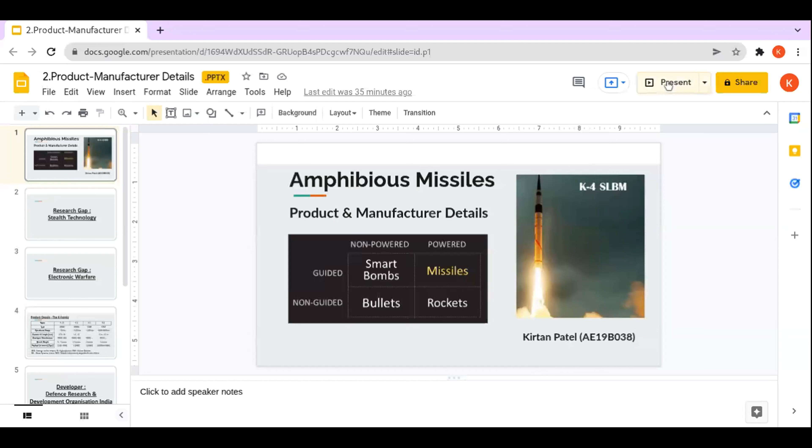So my focus will be basically on two things which I've narrowed down. The first is stealth technology. In November 2021, the Indian Navy introduced a stealth guided missile destroyer, INS Vishakhapatnam, which carries anti-submarine missiles. It was a 35,000 crore project, with a total of 4 warships to be delivered. The first was delivered in November 2021, 2 will be delivered in 2023, and 1 in 2025.

Now, the stealth technology which India has used is limited to ships. On the other hand, the AGM-158, in service with the US Air Force since 2009, is a stealth technology missile. It was developed by Lockheed Martin. It carries 450 kgs of armor to a distance of 1,000 kilometers. Not only the US, it has even been extended to foreign services, being used in Australia, Finland, and Poland since 2014.

India has not been able to develop such a missile, and stealth technology is limited only to ships up till now. So this is the point which I'll be focusing on further. The US already had 2,000 such missiles given to the US Air Force in 2016, while India has none. The other part I would like to focus on is electronic warfare.

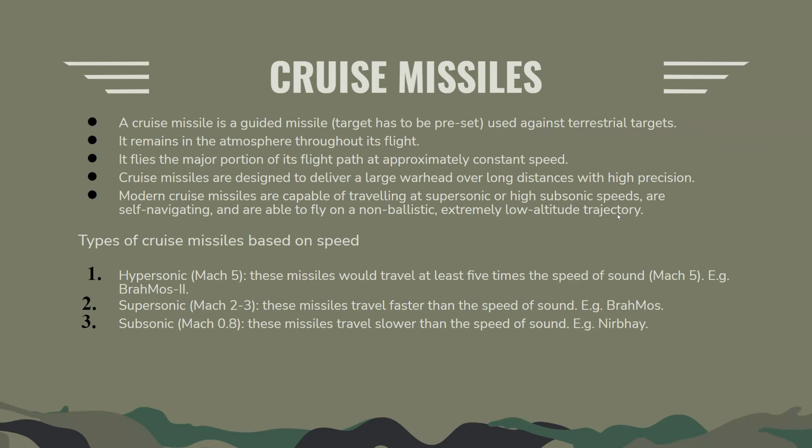Yeah, so we have Indian missiles, which are of different ranges and all. Pavitra, you can skip all these things. Okay. So what you are planning to do, so it is like BrahMos, it's fine. So then, okay, so sir. I need some technical strong base. So what you have done, some literature survey. And because you are from aerospace, no? No, mechanical engineering. That's fine.

So then, okay, ballistic missiles and ancient manuscripts. Basically this hypersonic missile, which is Mach number greater than 5, the idea for it I got from Vaishnavastra, which travels with fast speed, the hypersonic part of it. Even the defense minister has mentioned that this is the focus point right now, where we have to develop something in the hypersonic area. So that is going to be my central point.

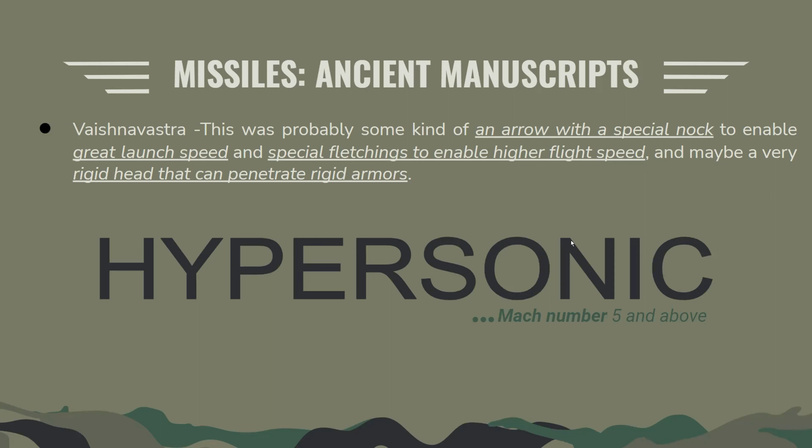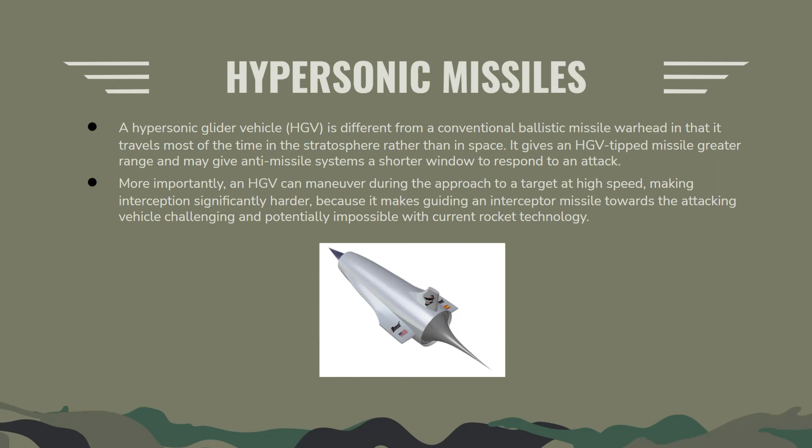And for hypersonic, this is going to be like a cruise missile type, wherein it passes a particular trajectory path, and then based on the navigation, it follows a certain path. So that is my plan. Mainly I want to focus on the design part of it, the propulsion system, because as the speed increases, the friction, heat generated and all will come as a disadvantage for us. So using metallurgy and design, solving these problems, and the cooling system also needs to be made more proper. So that is my focus, what I want to do.

So design of propulsion systems means you have to go for the scramjet, the supersonic combustion ramjet engine. There are several issues there. Do you know what is meant by positive thrust or negative thrust? No, sir. Positive thrust means whatever thrust you are producing should be more than your drag. Then only any vehicle could go forward. Some net thrust should be positive. It's something like that.

Then from a metallurgical point of view, you are from mechanical, so you can do a lot of heat transfer analysis. Yes, sir. I found a research paper based on it. Metallurgy means molybdenum alloys or some Inconel alloys, so it can withstand very high temperatures, and you can use Bartz equation. Bartz equation is used for high speed flow, let's say Mach number more than 5, how the heat is transferred from gas to solid. In between there are boundary layers, velocity, momentum boundary layers, and thermal boundary layers. It's based mostly on Reynolds number, Stanton number, and Prandtl number.

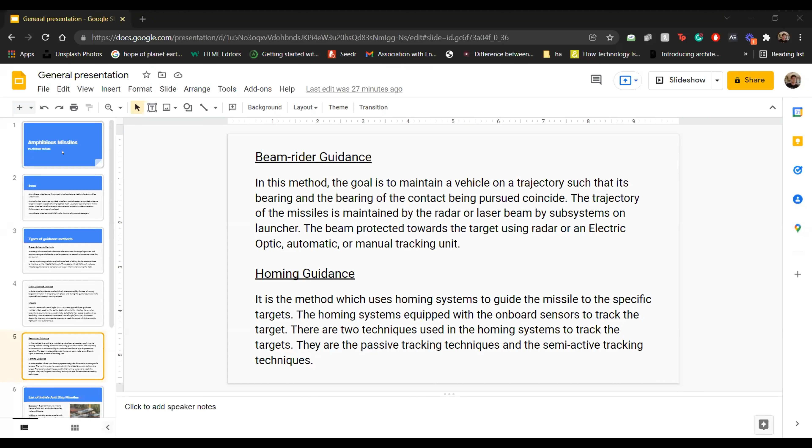Yeah, so I was able to attend the meeting last time, but I wasn't able to present because I was sick the whole week.

So basically, my topic is also amphibious missiles, and these are the basic definitions and theory about amphibious missiles that I wrote down. But since the missiles have 5 system components - targeting, guidance systems, flight system, engine, and warhead - my main focus and interest was towards the guidance system, as in how the missile goes and hits the target perfectly in almost all cases.

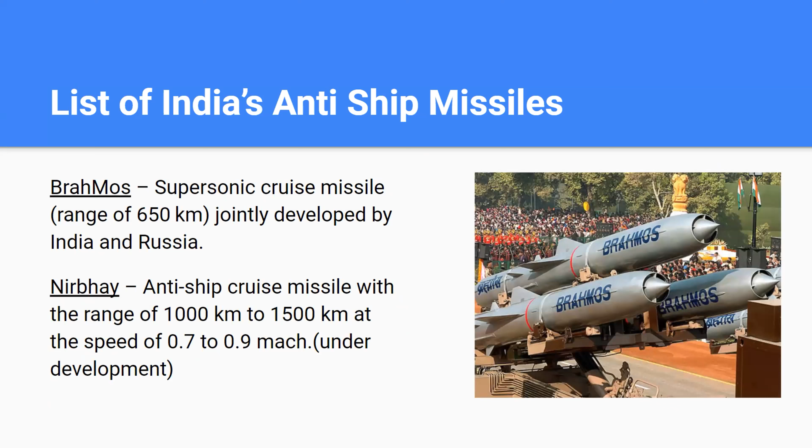So I went through what type of guidance systems are there and what are all the other guidance methods which are there. Towards the end of my very basic research, I looked at the guidance systems that India currently has and the ones it is buying and importing from other countries. My plan going forward is to solve the problem of precision killing.

So there are two issues. First is when the missiles don't clearly hit the target on point, and the other issue is basically the enemy recognizing the missile in range and then trying to combat it.

So with this, I found that the loitering munition system is one of the things which can help solve both of these problems. In a very recent news, I also read that the Indian Army plans to buy medium range precision kill systems, which has this loitering munitions.

Loitering munitions is basically something that loiters over the target for some time, so that even a target which is hidden and appears only for a few seconds can get hit.

So I wanted to focus on this and see what I can do here. There is a clear research gap in India currently because we don't have a loitering munition system of our own, and we are currently looking to import it from outside.

So it basically allows selective targeting of any target we are looking at. I wanted to focus on this. At this point I don't have a particular base on how to get started on this.

I've just been doing some research on what India currently has and what it is lacking in. I haven't been able to build a base yet, so would love all sorts of help from you to take this forward.

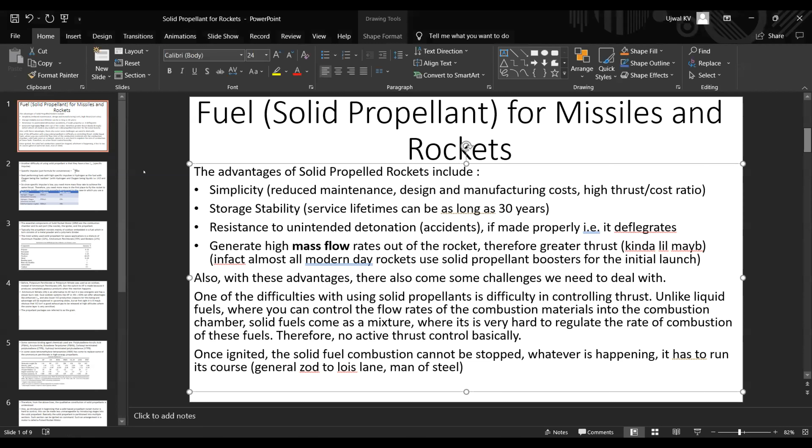Yeah, am I audible? Yes, we'll carry on.

So in the last meet, I presented the general overview on amphibious missiles, and you specifically instructed me to work on the fuels part. The two main important things are the guidance system, control system, and the fuel part. I did some research on the fuel part, and in the last meet I concluded that at least in the initial stages of launching the amphibious missile, we need to use solid fuels. Here is some justification why I feel solid fuels are important.

First is the simplicity of solid fuels. They are very easy to maintain and easy to design. All you need to do is make the solid fuel paste and put it in a rocket tube, line the tube with insulation, make sure the material can sustain high temperatures, and that's pretty much it. Even manufacturing costs are very easy. If you look at liquid fuels, you need so many pipes, pumps, storage of liquids, and make sure the liquids don't leak out from the chambers.

So solid fuels easily outperform liquid fuels in this area, and they even have a high thrust to cost ratio. If you look at the materials used for solid fuels—ammonium perchlorate, aluminium, whatever the materials are—if you sum up all their costs and find out how much thrust they generate, it has a high thrust to cost ratio. So it's very affordable. And then there's storage stability.

Solid fuels are also very easy to store. They can be stored as long as 30 years once the rocket is manufactured. So if India is keeping some missiles in its inventory, it need not continuously keep them under surveillance. It also has resistance to unintended detonation—for example, you must have seen when rockets launch, like SpaceX, etc., sometimes detonate, there's some margin of error. But for solid fuels, it's hard for accidents to occur. If the solid fuel chamber is manufactured properly, there is very little chance of detonation.

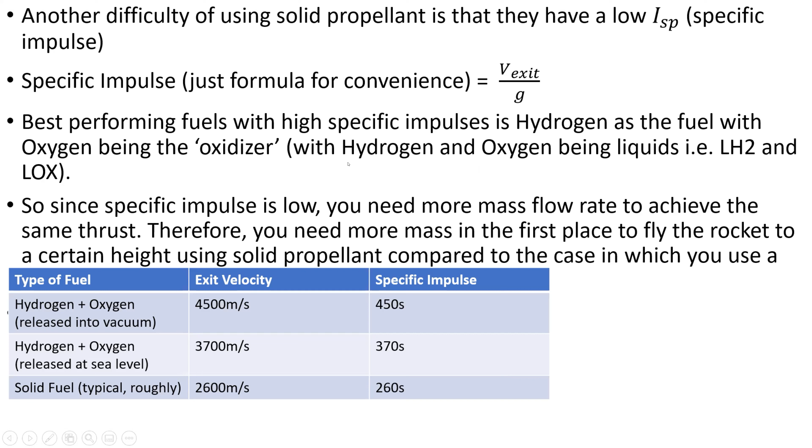Now let us explain the constituents of the solid rocket motor. It's the entire engine which has the solid fuel. It has a combustion chamber where the solid fuel is housed, an exit port or nozzle, and an igniter which ignites the solid fuel. The propellant is the main thing we need to develop, since the exit port and other parts are already engineered.

The propellant has an oxidizer embedded in a fuel. This is the main reason I chose a solid fuel instead of a liquid fuel — when the propellant has its own supply of oxygen, you don't need oxygen from air, which is why this missile can be detonated even underwater where there's no oxygen. If you keep the solid fuel inside water and ignite it, the reaction still happens and thrust is still generated. Compare this to ramjet engines, which need a steady flow of atmospheric oxygen to work.

The percentage composition of the solid fuel consists of aluminum powder, ammonium perchlorate, and binders. Aluminum powder is the metal which takes away oxygen from ammonium perchlorate, which is the oxidizer. A binder, as the name suggests, binds the aluminum powder and ammonium perchlorate together to create a homogeneous mixture. This might remind you of the thermite reaction, where aluminum reacts with iron oxide, removing oxygen from iron and generating heat — it's very similar to that.

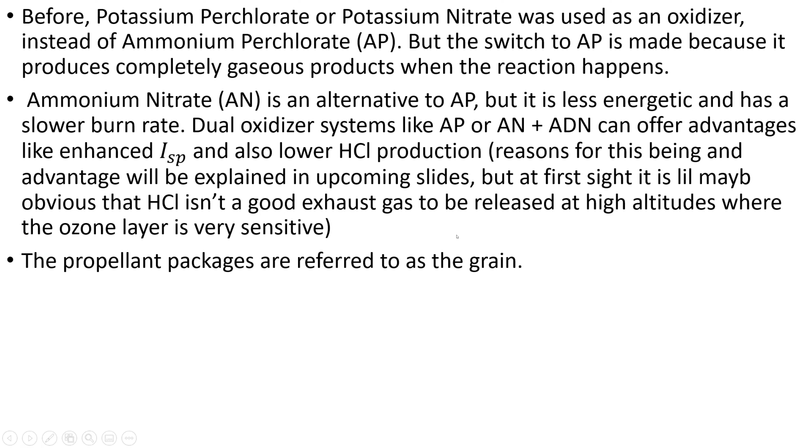And here's some convention. The propellant packages are referred to as grain. So if you look at propellant in the combustion chamber, propellant in storage is called grain. And so now we covered oxidizers. Now let us come to binding agent. Binding agent is the agent which binds the oxidizer and the metal powder together. And there's nothing conceptual in it. They're just standard chemicals: polybutadiene, acrylic acid, EVA. So these are the industry used binders.

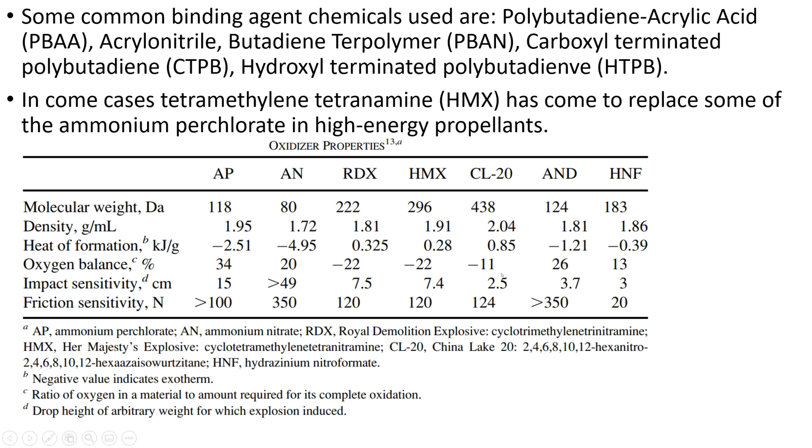None of them are really toxic. I mean, there's a lot of concept in oxidizers, but here I think there's not much. We can use any one of them. We can do some experiments and find out which suits our rocket. Here is some data regarding their density. We can do some optimization which has lesser mass, etc. So from the above lines, the qualitative constitution of solid propellants is understood.

And also in the beginning, we said solid propellant rocket motor is hard to control, because if you look at something called thrust vectoring, it is what is used in SpaceX, NASA. Basically, the nozzle can change its orientation to balance the entire rocket's mass. But this is hard to do for solid rockets, because first of all, in solid rockets, you cannot control mass flow rate and you cannot even change the orientation of the nozzle. But there is some engineering trick that we can do.

What we can do is we can make this less chaotic by introducing stages to the rocket in the solid propellant. Basically, we'll split the solid propellant chamber into multiple chambers, sub-chambers. So it's partitioned into multiple sections, and each section can be ignited on command. Because once a section is ignited, you cannot stop it. So why not just split it up into multiple sections where you can control each section? And such an arrangement is called a pulsed rocket motor, which we can use if you want to control it.

So now we can go to green propellants, because as I mentioned before, ammonium perchlorate is actually a very widely used oxidizer. But recently, even DRDO, all scientists realize that it's not good for the environment. So that's why scientists are aggressively developing green propellants. Basically, ammonium perchlorate as an oxidizer releases HCl as a combustion product, and this is dangerous for the environment. It can degrade the ozone layer, cause acid rain, etc. So to mitigate this, green propellants are researched by various organizations across the globe.

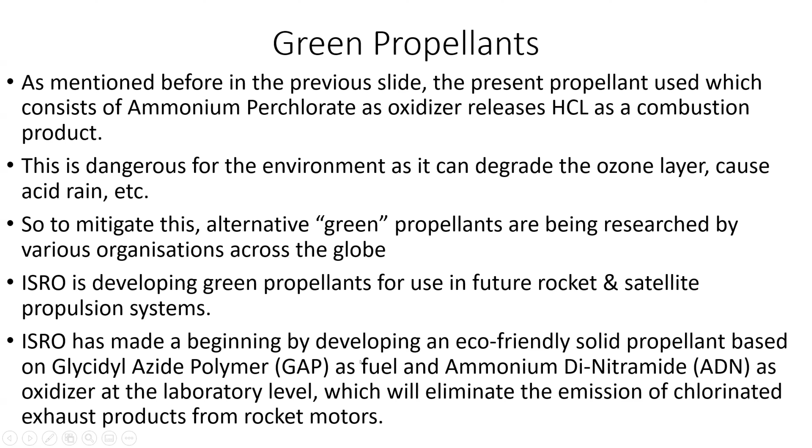So what ISRO did is, instead of using ammonium perchlorate, it used GAP as fuel and ADN as the oxidizer. And at a laboratory level, meaning it's research only. We don't know if it's practical or not. We should do our own tests.

So what they said is, if you use ADN and GAP instead of ammonium perchlorate, it will eliminate the emission of chlorinated exhaust products like HCl, etc., which are dangerous, as we know. So this is a good alternative that we may research. Also, ISRO is carrying out various green propellant combinations, such as hydrogen peroxide as an oxidizer, liquid methane, ADN, methanol water, all those things.

So yeah, but this is like very advanced research. I don't know if it's used in industry, but in industry, ammonium perchlorate is used. Yeah, and one more thing, as I said, it's bad for the environment, right? If you use ammonium perchlorate, it emits chlorine. But one good thing is, by chance, solid fuels are only used in initial stages of the rocket, because in initial stages you don't need much control, right?

Because what is the disadvantage of solid fuels? The main disadvantage is, you cannot control the fuel. So why not just use it in the initial stage, and once the rocket attains the necessary speed and necessary height, then you use ramjet or scramjet or anything where you can control the rocket.

And as you know, at initial stages, let us say HCl is produced, it cannot reach the ozone layer, right? Obviously, it will be harmful near the ground, but at sea level, if there are chlorine ions, it won't really go to the ozone layer and cause acid rain and all, right? If we can contain it.

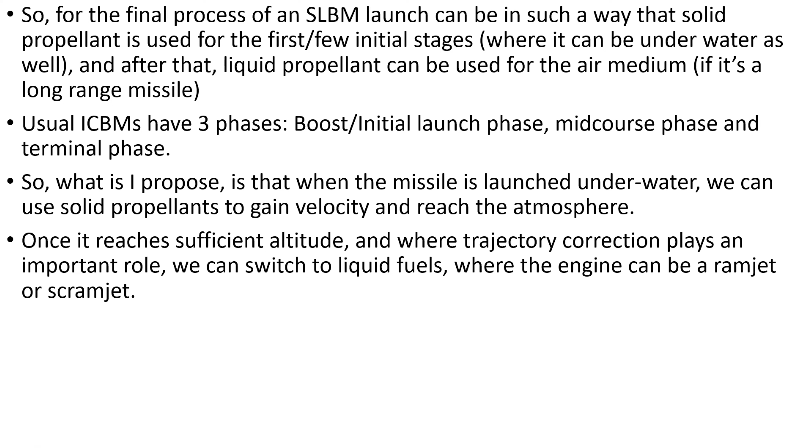All these things are contenders, but still they are at the research level, not going to the system level applications.

Okay, but you can do something like the NASA CEA program. I think Jagadeesh, you know that, no? Yes, sir. We train students in it. You try different fuel and oxidizer combinations and see which gives very high specific impulse. You just try trial and error.

So you can arrive at different specific impulses at sea level and at high vacuum. If you see solid propellant, we can get a maximum of 260 seconds, whereas with liquid cryogenic propellants like liquid oxygen and liquid hydrogen, we can get a maximum of 450 seconds at vacuum. So this is the thing.

Whatever fuel you are proposing, hydrogen peroxide, it is like 150 seconds of ISP, but still we are using it for other applications that don't really require very high specific impulse. So the thing is,

for an underwater missile or any application, the rocket propellant should contain both fuel and oxidizer. For underwater missiles, we can use that, or we can take water from the sea as oxidizer, because H2O contains oxygen. Then you can use some fuel like, as you mentioned, ADN or methanol.

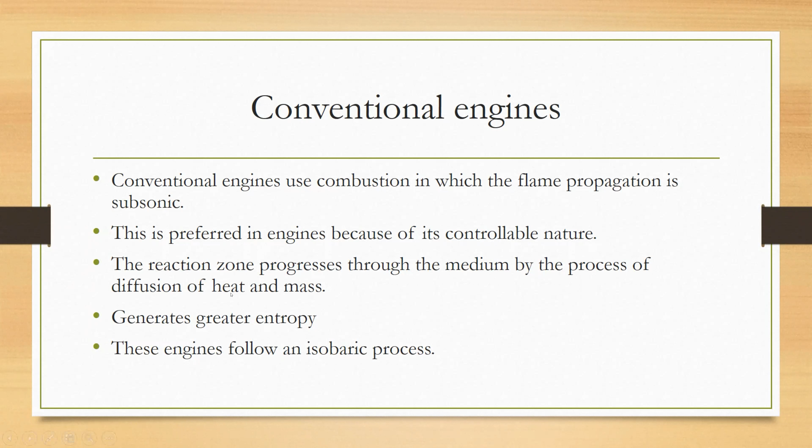Now, detonation engines use a particular composition of fuel and oxidizer such that the flame propagation speed is supersonic. The reaction zone progresses as a shock wave, which increases the pressure. This leads to higher efficiency because the entropy generated is significantly lower than in conventional engines. These engines follow an almost isochoric process. So there's a 25% increase in efficiency if we use a rotating detonation engine. There are two types of detonation engines: the pulse detonation engine and the rotating detonation engine.

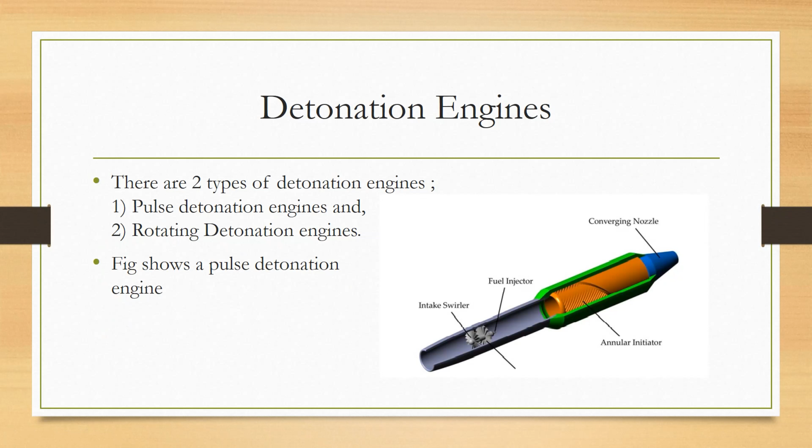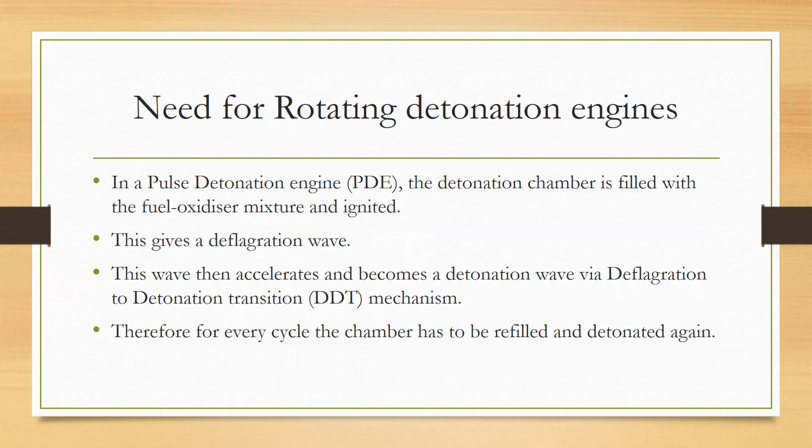A pulse detonation engine is just a straight tube in which the fuel is injected. The flame accelerates from the intake and gradually reaches supersonic speeds through the DDT mechanism, the deflagration to detonation transition mechanism. But this limits the maximum possible frequency at which the pulse detonation engine can be operated, and this limits the maximum possible thrust. So to improve the efficiency, we need rotating detonation engines.

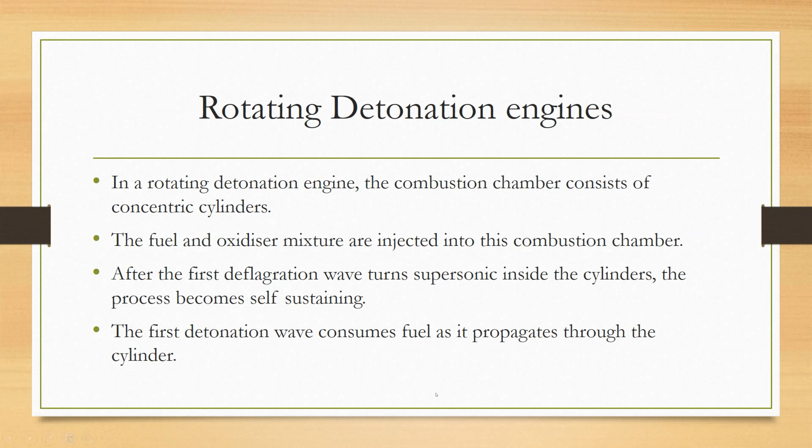So in future, rotating detonation engines will be used in rocket engines, ramjet engines, turbojet engines, missiles, UAVs, etc. These engines are valuable because of the higher efficiencies, and because the detonation wave itself generates such high pressures, there is no need of extra turbines and compressors. So it saves a lot of weight, and the extra efficiency means lesser fuel needed. So again, we can lift higher payloads.

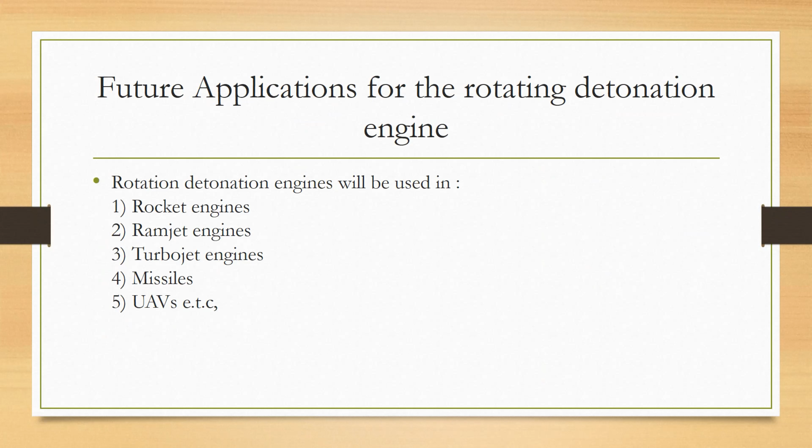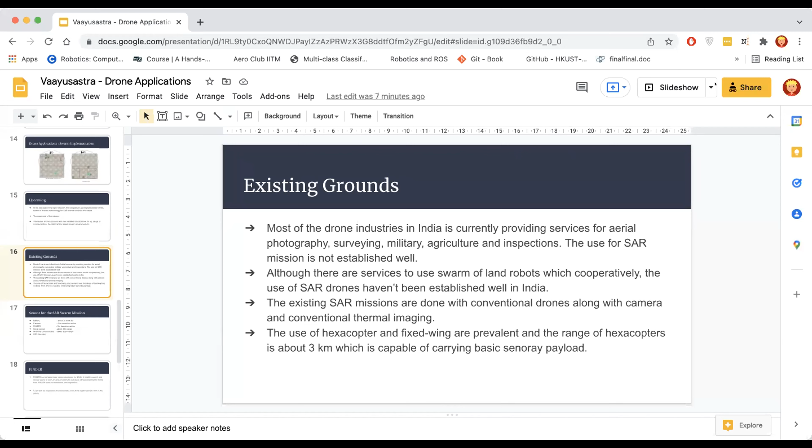Can you see my screen? Yes. I'll make it quick. So for this week's report, I looked around at the existing things for search and rescue drones, the SAR drones, which is my topic. Mostly in India, the majority of drone startups are focusing on photography, surveying, military, agriculture inspections, mostly with hexacopters or fixed wing. Both have a few advantages.

Hexacopters can be easily maneuverable, but fixed wings have a larger range, like 20 kilometers, based on their motor specifications. So far as I have searched, there is no company dedicated to search and rescue missions, or providing search and rescue missions in a swarm way, which I am suggesting. Recently, a Chennai-based startup lent their drones to our government for search and rescue missions in Uttarakhand, using cameras and imaging sensors to search for people within caves and avalanches. But none of the startups are using swarm technology, which I have taken up for this internship.

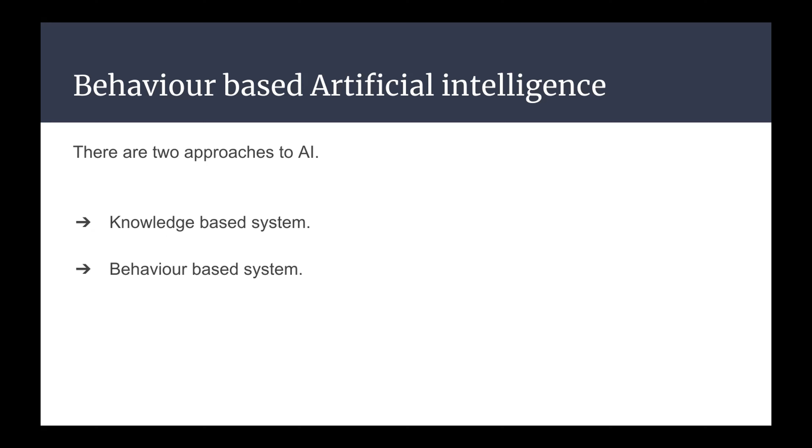The second is the spiral method. While the swarm of drones reaches a specific point, if it finds some survivors there with the help of the finder sensor, it detects a cluster of survivors, because if an earthquake or something happens, people usually collectively go to some spot rather than scattering and running away.

So if a drone in the swarm finds some survivors, it starts to spiral around them to collect more information, like how many people are there, are they dead or still alive. That's the spiral-based method. The third is the scatter method, which is completely different—scattering in a very random way so that it covers most of the exploration area.

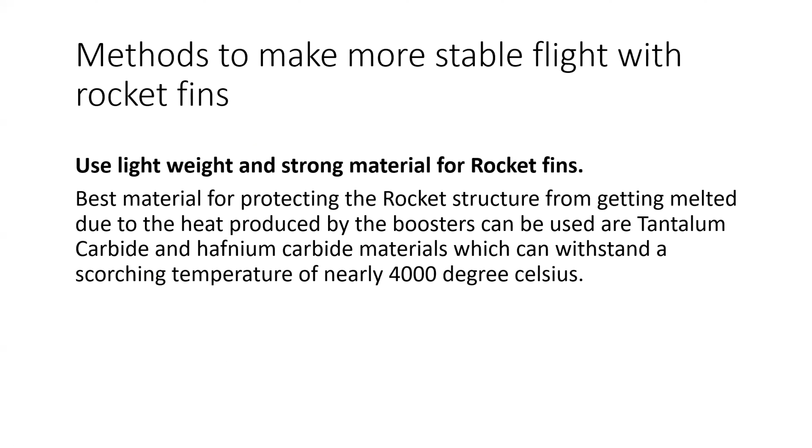And sir, using this way we can make the center of gravity shift to the upper side of the rocket, and this will create a large distance between center of pressure and center of gravity. Next, what we can do is airfoil the shape of the rocket fins.

The shape of the rocket fins can be made using airfoiling. That airfoiling structure provides more lift to the rocket at a smaller angle of attack, and it also reduces the drag. For making the material of the airfoil fins, we can use carbon, aluminum, and titanium alloy, which will also reduce the weight of the rocket fin.

And sir, also we can— Do you think these materials are lighter? They are heavy, yes sir. I think titanium and carbon-based materials have a very high density, so that will be heavy.

They are very strong and lightweighted, right? So these are also used in aircraft and everything. These alloys are used. Puvi, you did a basic project on shape memory alloys, no? Regarding titanium, like nitinol, and carbon composites—they are low density, they are light basically.

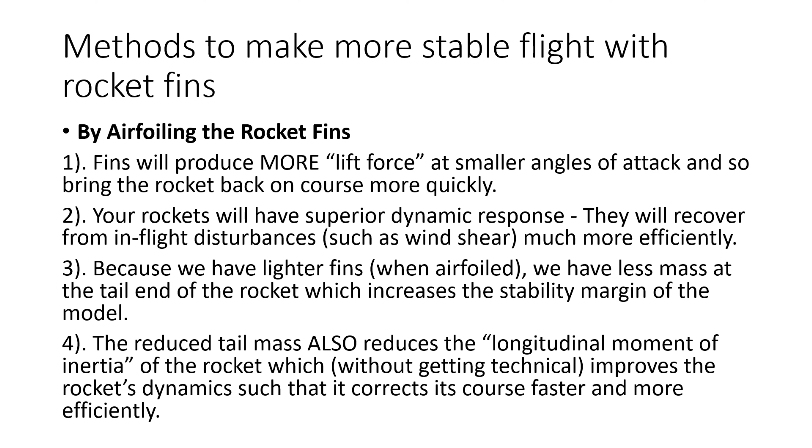Next, so what can we do quickly, Aditya? What's your next slide? So effective—so you have the idea now. You got the idea, what's the next slide?

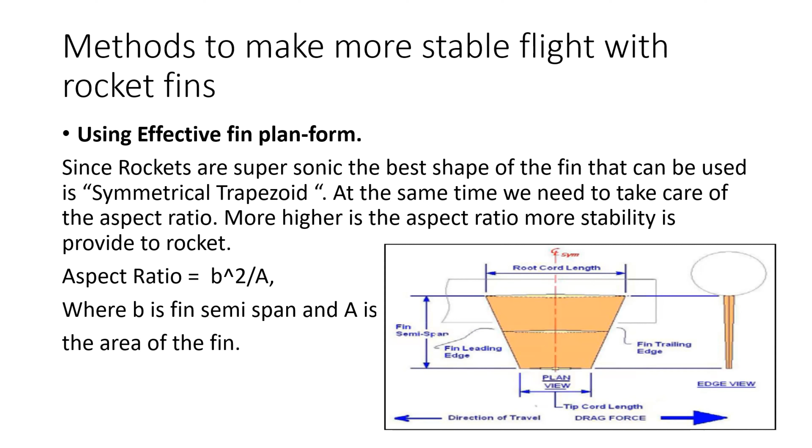Sir, we can also reuse these rocket fins, since these are attached in the first stage boosters which get separated. No, I'm just seeing how to implement these ideas practically. Go to next slide.

Next, sir, by using the method of thrust vectoring— Okay, without fins, okay, next. Up till there, I wanted to make the rockets using fins.

Okay Aditya, which design software are you good at? Sir, I'm not experienced in that. Any software, no? No sir, not yet. Then you need to learn some design software.

Now convert all these ideas into drawings. Did you start learning engineering drawing? Yes sir. Super, AutoCAD—so AutoCAD is enough, just draw whatever ideas you are mentioning.

No, yes sir, let's try designing a few fins and start implementing it. Next slide, go to next slide. Okay, this much only—like my idea was to, I got the idea.

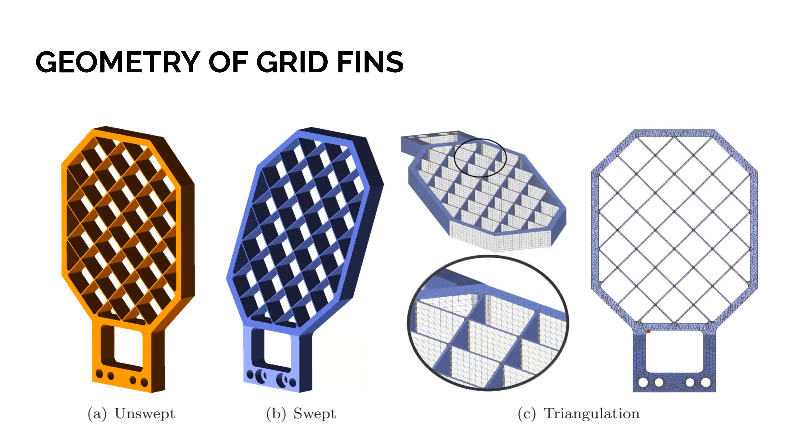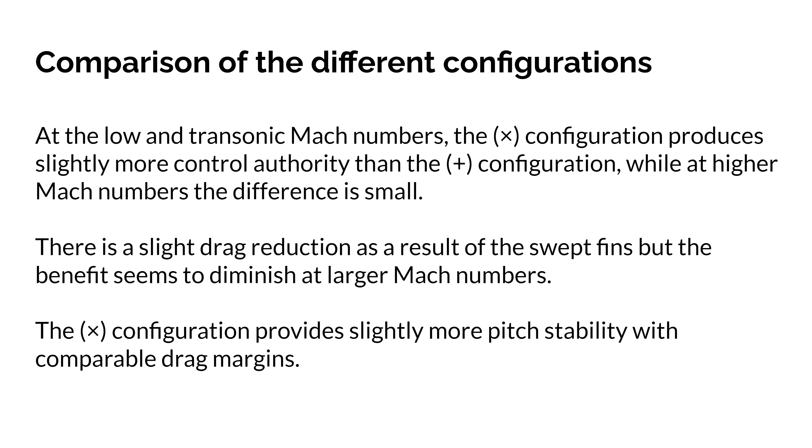So I was reading on that. Next I was thinking to look into other ideas too, to see if we can implement two or three ideas together, like coarseness of the lattice into the swept back design, and different grid fins with peaks involved in the webs. So I'll compile different ideas and see if they make a better model for the fin. That was my work for the next week. These are all I found in this one week, and I'll find another research paper after that to read on.

Okay, so you know 3D software? No, sir.

AutoCAD — but I can learn, I can try to learn it in this one week because we can try this, it's much simpler to try. So in the next week, I can try learning the design software and come up with the design itself. If you pass the design, you can even print it and do some tests. Sure, first with general airflow or a water jet we can try it.

So I'll stop sharing? Yes. Sir, I'm sorry, I couldn't hear you, my net is a bit unstable. No, it's fine, yeah it's fine. Okay sir, thank you sir.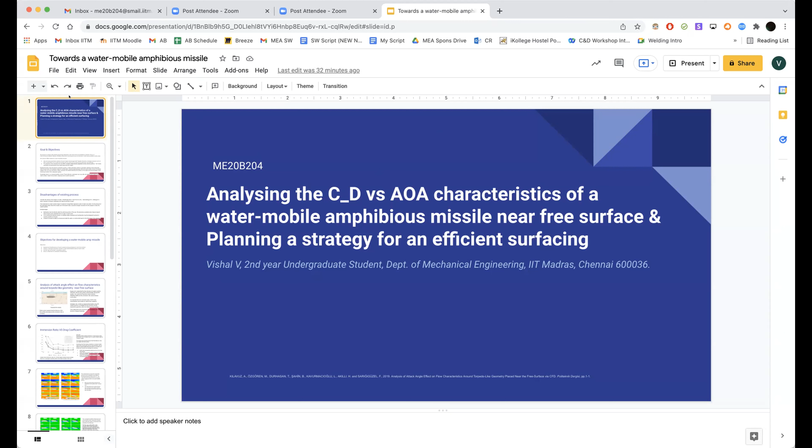Next, who is next? Hello. Who is next? Next, Vishal can present, Vishal. Yeah. Hello. No, Jayaraman sir is back. Yes, yeah. Okay, go to presentation mode. And... yeah, so.

Good afternoon, this is Vishal, second year undergrad from the mechanical department. Last week, Dr. Jayaraman sir suggested I look into the fluid dynamics of a design I had proposed. In last week's presentation, I talked about the evolution of amphibious missiles, and we also saw the state of the art, which has a short trip inside water, with most of its technical aspects coming into play only in the air. The state of the art is Trident 2, which uses a submarine; from water it comes up, and after that the rocket propellants get into action.

So I would like to analyze the coefficient of drag versus the attack angle characteristics of a water-mobile amphibious missile near the free surface, and plan a strategy for efficient surfacing. Analyzing the CFD part is from a paper I read on the water-mobile amphibious missile, and suggesting a strategy is what I'm going to do.

We saw that Trident 2 is an intercontinental ballistic missile that uses solid propellants, mainly because using jet engine technologies inside water would cause the flame to go out. So solid propellants are the only option that works inside water, but they have disadvantages — they have to carry their own oxygen, and fuel alternatives like hydrogen peroxide, as the previous presenter spoke about, are still areas of ongoing research.

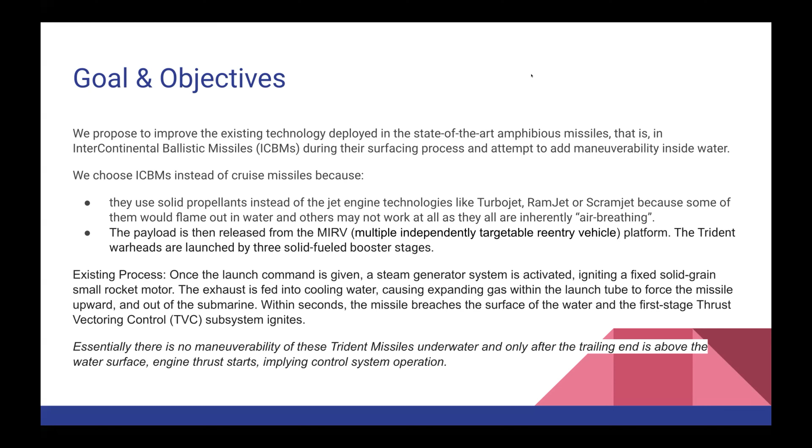And by a quick calculation, Vishal, we could see that the... what about the thrust inside the water? Do we require more thrust or less thrust when compared to air? Sir, actually the drag would be more, sir.

So just through its momentum, the missile is trying to come out of the water. What happens is that an explosive flash vaporizes the tank of water into steam, and then purely due to the pressure it's coming out; there is no engine turning on, there is nothing happening. The cap opens up, and due to this flash vaporization, the missile barely makes it out of the water free surface.

So the disadvantages are that the submarine must be directly under the surfacing portion of the sea, and also there is an explosion happening inside the submarine to give the momentum to the missile. So this is an extremely delicate process, and multiple safety measures have to be made to not make the missile go off underwater in the submarine itself, where the captain is present. It also doesn't provide maneuverability inside the water.

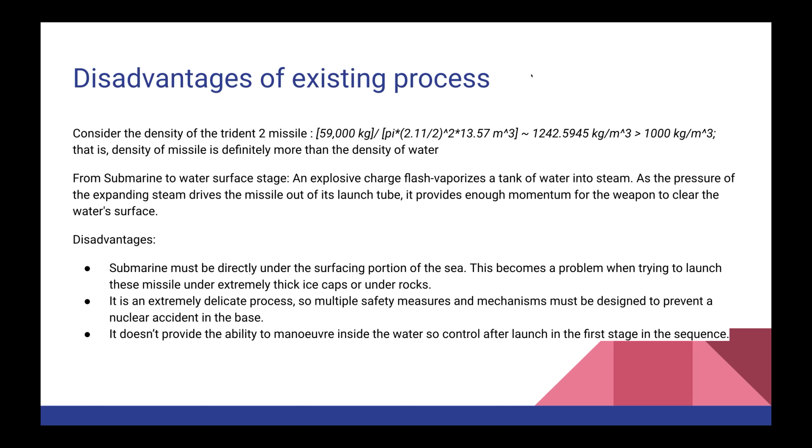So the objectives for the design I'm proposing, a water mobile amphibious missile: first, before finding any engineering solution, we should analyze the physics of it. We will see, assuming a missile is going underwater, how that moving missile can surface the water and go up. So first the analysis part, and second designing a multi-type propulsion system like the previous speaker talked about: solid propellant inside water, and then scramjet and jet engine technologies above the water. Those things we'll see later.

In the fluid dynamics part, one term I would like to introduce is immersion ratio. From the schematic, you can see the axis of symmetry of the missile, and from the axis of symmetry to the free surface, let's say the normal distance is h, and the diameter of the missile is d. So we call the immersion ratio h by d. When h by d is 0.5, that is half, the missile is just touching the free surface.

Earlier works, before these papers, were done not with the shape of a torpedo but with spheres and other geometric figures. What we could see is that as we come closer and closer to the free surface, the coefficient of drag and other parameters fluctuate to a significant extent compared to the missile being well below the free surface. Below the 2.5 immersion ratio, near the free surface, there is much fluctuation, and beyond an immersion ratio of 2.5 depth, the parameters and data are well-defined.

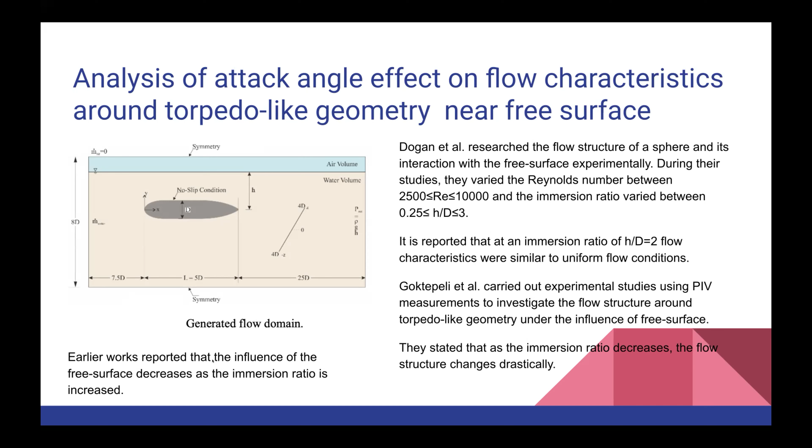Can you go to the previous slide? They stated that as the immersion ratio decreases, the flow structure changes drastically. What is it actually? Sir, in the process of surfacing, the immersion ratio decreases, and when it decreases the flow structure changes drastically. I will show diagrams of the flow in the next slide, sir. Okay. So at 2.5, this is the plan I'm suggesting to maintain a not significantly increasing CD, so as to prevent the missile from spinning or going in spirals.

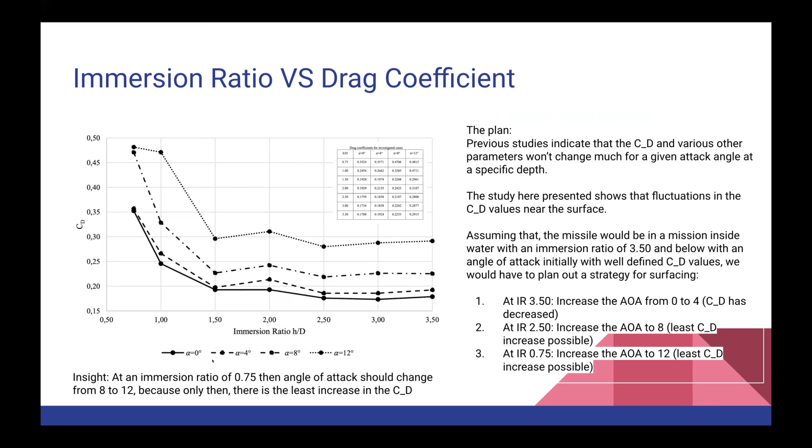As you go deeper below the surface, there is a near-symmetric flow structure at the bottom row, and at zero angle of attack there is much symmetry. But as you go up near the free surface, the symmetry is reducing. As you increase the angle of attack near the free surface, the symmetry is increasing. The asymmetry increases as we go near the free surface, but if you also increase the angle of attack, symmetry is regained.

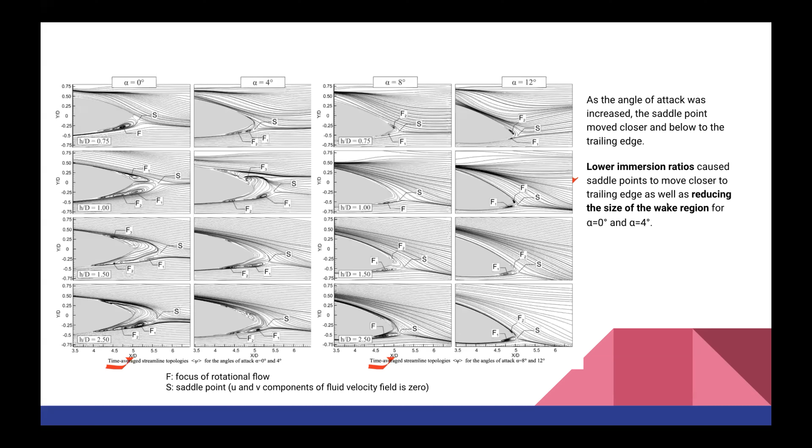You can blindly follow this, but my opinion is that you take a lot of research areas, like optimization of this vehicle configuration, what kind of fuels will give better performance, all these things, trajectory. So this is actually good. But if you can reproduce these results, this will be a good one. Okay, it's my opinion.

They have mentioned only the immersion ratios and only angle of attack. So you can vary the velocities for different angles of attack, because you cannot say the vehicle will swim only at a particular speed. It can go with a different range of velocities. So obviously, angle of attack and these factors will influence that. And the fuel needs: we have different kinds of solid propellant fuels, and we can choose any one of them.

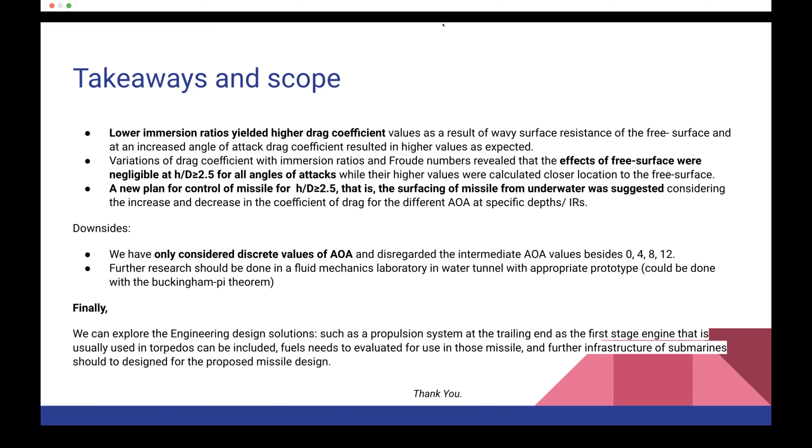Since you are from mechanical, you should use proper terms like angle of attack and drag coefficient, something like that. Okay. Nice. Okay, Vishal. Done.

So then, who is next? Aditya Raja, Aditya. Sure, may I call? Next is Aditya Amit. Okay. Shreya, you are in a hurry or something? Yes, sir, I'll present my screen. Sir, am I audible? Yes, yes.

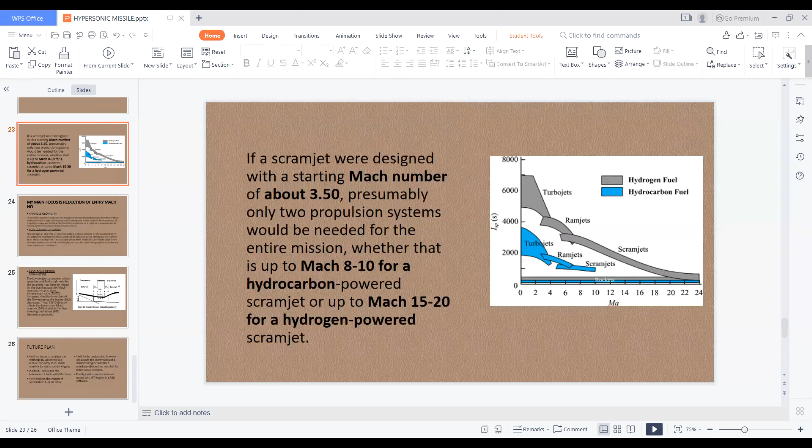Okay, so last time I prepared the slides for hypersonic missile, and I didn't have any base for what I should work on. So it was decided that I should work on the scramjet engine in hypersonic missiles. So this is my preparation. I'll take you through the basic part very fast, and then I'll come to my major ideology. First I introduce what hypersonic is: basically hypersonic is when we exceed Mach number of about 5. You're from aeronautical, no? No, sir, I'm from mechanical engineering. Okay, carry on.

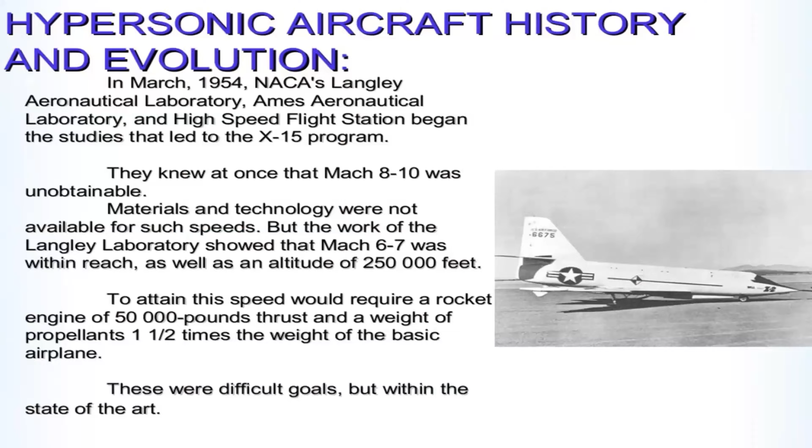Yes, sir. So there I have written some of the names of the old hypersonic missiles, and then the evolution. These are some of the recent ones, like the Boeing X-51, where they have used a scramjet engine, and similarly BrahMos 2 and Shaurya. There are many engines available; based on our requirement, we use engines like turbojet, ramjet, scramjet. I am working on scramjet since hypersonic missiles require it, and for high Mach number exceeding 6, we use scramjet engine only, and this is the level of propulsion they provide.

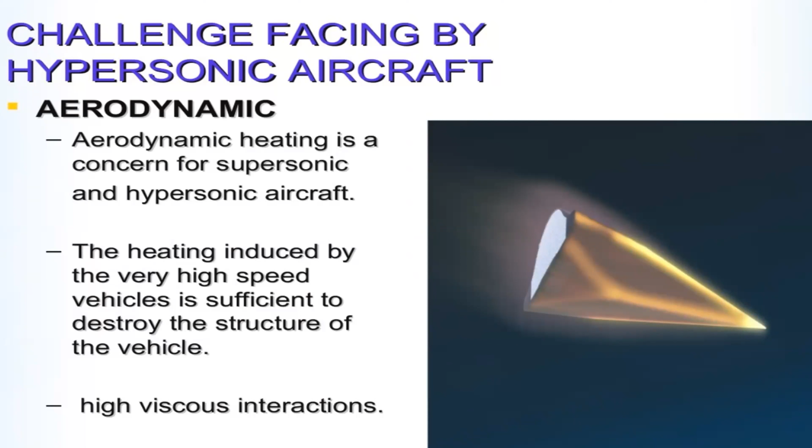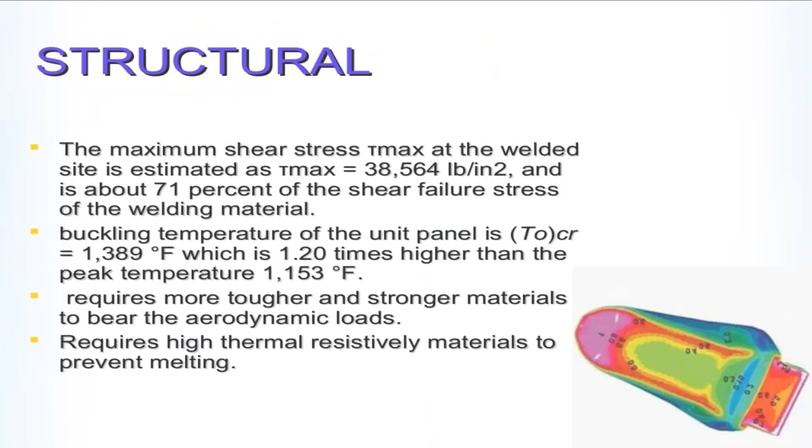There are certain challenges because it works at a high operating speed. The biggest challenge is the aerodynamic drag, and also the heat induced due to this drag, due to viscosity. So we need to choose the material smartly so that it can handle the temperature. There are also structural constraints: because of vibration, the material should not crack or fail. Then we also need an advanced control system for stability. This was not my research; I want to focus majorly on the engines.

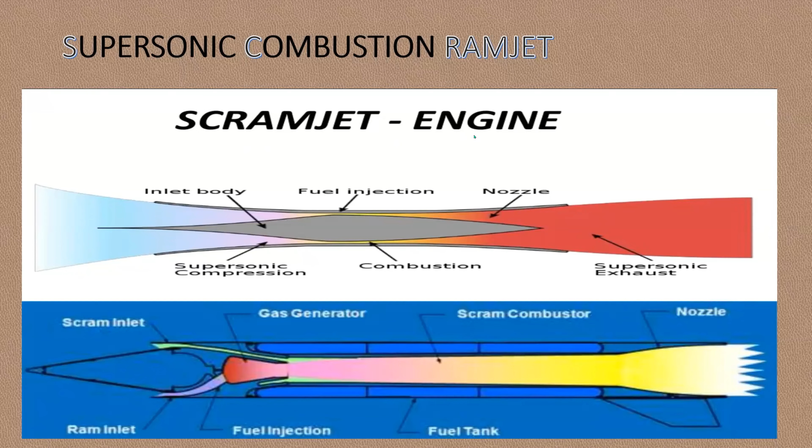So this is the scramjet engine. Basically this is an advanced version of the ramjet engine. In a ramjet engine, combustion usually occurs in the subsonic region, but here combustion occurs in supersonic. That is why the name supersonic combustion ramjet engine, abbreviated as scramjet engine. Then I have explained the working of the scramjet engine, and some basic history about it, how it came into existence.

And these are the parts of the scramjet engine: converging inlet, combustor, and diverging nozzle. So basically everything is ram effect here. Because of the ram effect, the suction happens, and then it goes to the combustor, and then finally to the diverging nozzle. So the diverging nozzle part is responsible for the thrust which we require. So I have explained the function of the major parts of the scramjet engine.

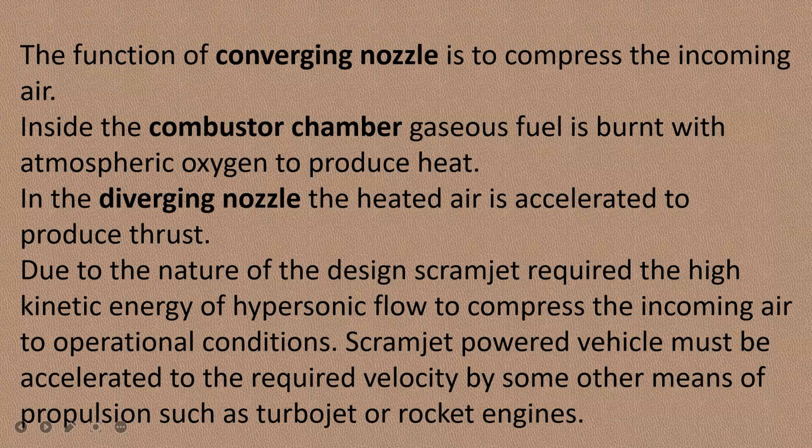And then again, working principle. So the advantage here is, like in the turbojet engine, we have moving parts, we have a compressor and turbine, whereas in the scramjet engine there is no moving part. It's simply an inlet body, converging inlet, combustor, and diverging nozzle. There is no turbine or compressor as such. So it has less weight, it is easy to manufacture, and most importantly, it can attain speed up to Mach 10 with hydrocarbon, and with hydrogen fuel it can attain an even higher Mach number.

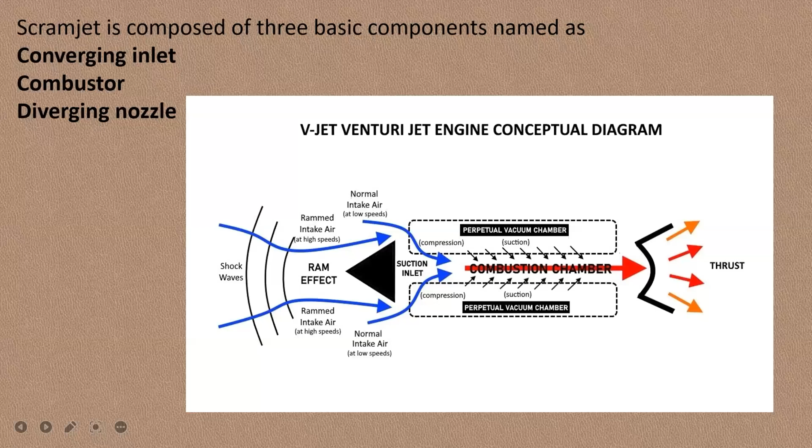And again, it has some disadvantages also. Its cost is high, and also the insulation material that we require here should be good because there will be more heat generated. And it does not operate at atmospheric pressure.

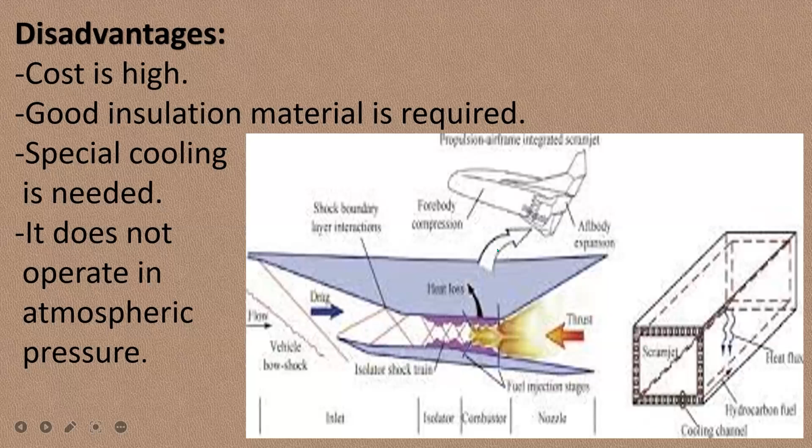So now I'll come to my main part, which I am focusing on. I first narrowed down to the problems with the scramjet engine. There are many problems: because this scramjet engine is operating at very high speed, there's a chance that fuel might not ignite at all, or even if it ignites, it can take place outside the combustor region. Because the speed is so high, our combustion region may get shifted. So we need to take care of this problem. We need to work on this.

And also the temperature, as I said, there will be extremely high temperatures. So we need to take care of the material. We need to choose material that can handle it. And the biggest problem is that this scramjet engine works only in a supersonic region. We purposely want it to work in the supersonic region.

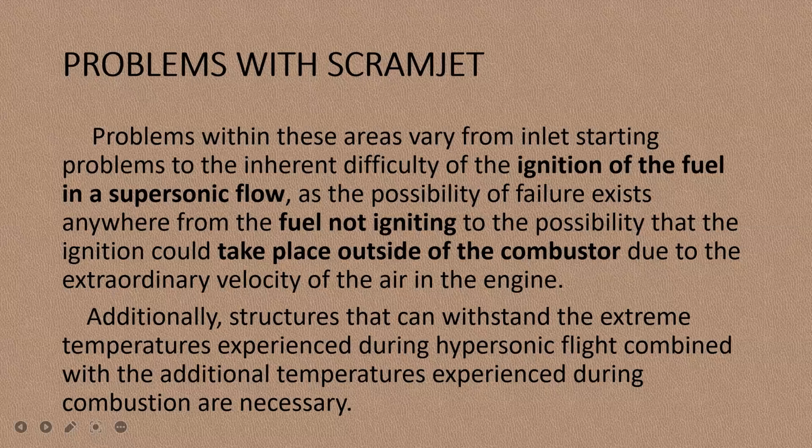So to work in the supersonic region, we need some initial propeller. The missile won't have high speed on its own. To have the scramjet engine working, we need some initial Mach number that is attained by other engine sources. We can use a rocket booster, or any other engine to attain that Mach number. I'll call this Mach number the entry level Mach number. Till now, the entry level Mach number is 5 to 6.

But what I am studying right now is analyzing how I can reduce this entry level Mach number, because if we use a rocket booster to attain this entry level Mach number of 5 to 6, we'll have to have some solid propellants inside, and maybe oxidizer also. Because of it, there will be unnecessary weight, and for the same weight to attain high speed, we'll require a more complex system. That is why we should aim to have a low entry level Mach number with the same output as compared to this high Mach number.

So I am working on reducing the scramjet's starting Mach number. This will have many advantages. One of them is the overall weight will be reduced. Also, payload will be available then. So basically there are two fuels which you can use. One is hydrocarbon and the other is hydrogen. Hydrogen, as I said in the previous slide, will have an even higher Mach number. And for hydrocarbon, it's about 8 to 10.

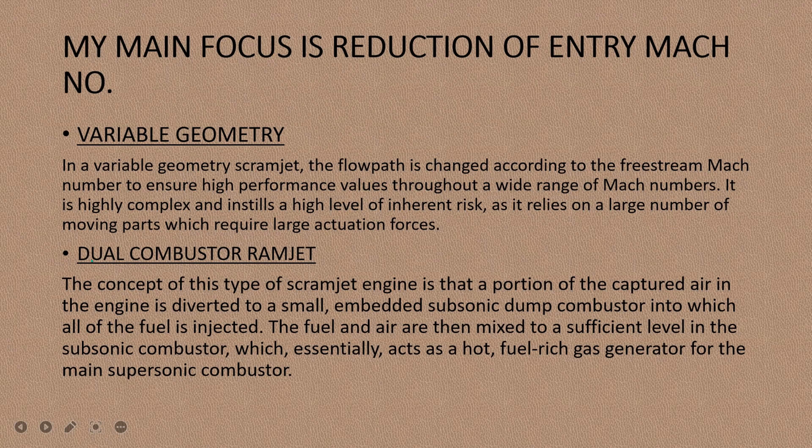Yeah, here this we can use. What we do is basically, because there's a problem of having supersonic combustion efficiently, we can instead use two combustors. The combustor will begin at the subsonic region, that is called a subsonic dump combustor, and then it will act as a fuel for the supersonic combustion region. Even this had its disadvantages. I could not find much on this, but I will do it when I come again.

And the third option is to basically modify the design parameters only. Like if we vary the temperature ratio, for example, this is one of the design parameters. There are various things. If we can vary the ratio of temperature at the inlet of the combustor and at the free stream, like the main entry, if we can control this ratio, we can have a Mach number which can be around 4 or 3.5. So that is what our aim is.

Yeah, so that's all. And I have also started working on the fuel required and fuel to air ratio. I haven't concluded it yet, so I have not mentioned it as of now. And these are my future plans that I will continue in the next 10 years. So I will continue to analyze the methods by which we can reduce this entry level Mach number.

Also, the behavior of the fuel ratios' impact. And also, I want to understand how do we design, like how do we decide certain dimensions for our requirements. So I found a resource for this also. So I will work on this part in the next 10 years. And finally, if time permits, I will make the model of the jet engine using CREO software. Yes, so that's it from myself.

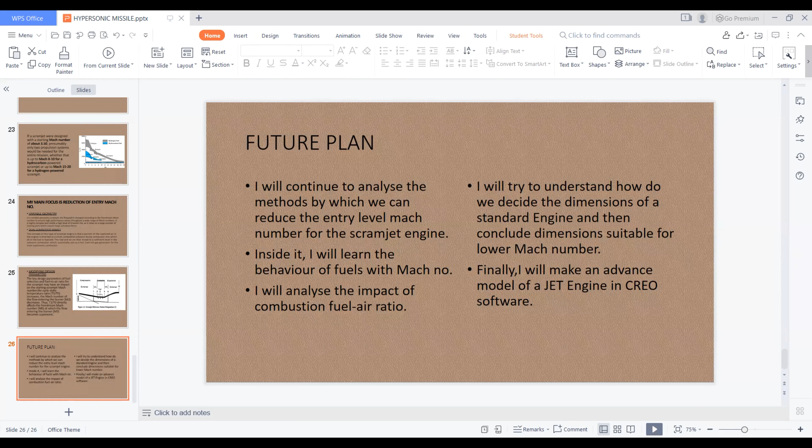Yeah. So then, entry level Mach number reduction. Can you go to the previous slide? Yes. This one. So here, what is happening essentially, in the external compression, here the kinetic energy is converted into pressure energy in the diffuser. So your entry level Mach number should be Mach 5. Then only we can call it hypersonics. Less than that, we cannot call it hypersonics. So your Mach number should be more than 5.

Okay, so if you want to decelerate this Mach number 5 to a very low Mach number, your kinetic energy is converted into pressure energy, no? So obviously your pressure and temperature will be increased. Yes, sir. So if you are decreasing so much, because why we are not going for ramjet? Ramjet means the combustion should take place in the subsonic region. Yes, sir. So you are in which year? Third year or fourth year? Third year, sir. So you have studied already gas dynamics, jet propulsion, everything.

In this case, if you are decelerating the flow from Mach number more than 5 to less than Mach number 1, it creates so much pressure as well as temperature, because the temperature is the one which decides the overall thrust. What is the temperature difference? The del T. So let's say your inlet temperature to the combustor is 1000 degrees centigrade. Due to combustion, you can have a temperature of like 2500 degrees centigrade, only a del T of 1500 degrees centigrade. So that del T has to propel the vehicle. Yes, sir. So that is very difficult.

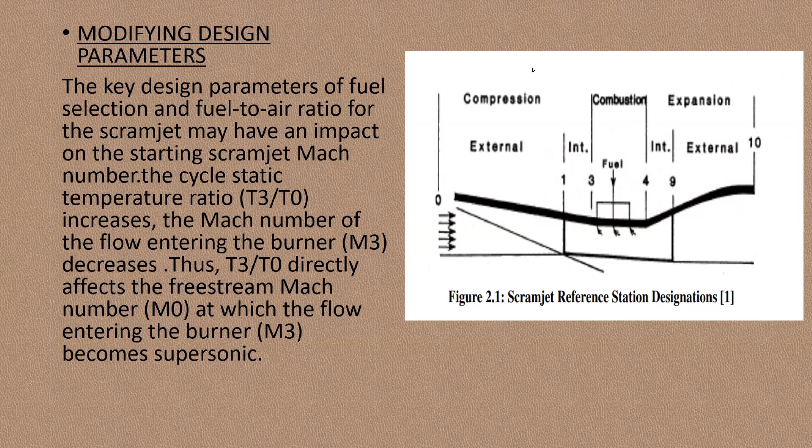Okay. Okay. Okay, Aditya. Yes, thank you sir. I'll stop sharing. Okay, next is Shreya. Yes sir, 1 minute.

Good evening sir. So this week I've been working on the model. I was given the topic fins, and as mentioned last week, I was working on elliptical fins. I studied more about it and tried to model it in open rocket software to see the simulations, and how the velocity and stability numbers can be with the model I create. I also read that opting for 3 fins is efficient, but for alignment and other reasons, having 4 fins is preferable. So I used a 4 fin model, and adjusted the length and diameter so that I get good stability, such that the CG stays ahead of the CP.

I considered all these points and came up with this model. I also studied about the general rocket's diameter and length. Since we are working with a basic model in open rocket, I thought the diameters and lengths I used are okay for us. I kept basic things that are necessary, like rocket and shock cords, and used one basic engine. If we want the apogee to go beyond this value, we can simply change the motor here with a high power one, then we get the desired apogee, and the maximum velocity also changes with that.

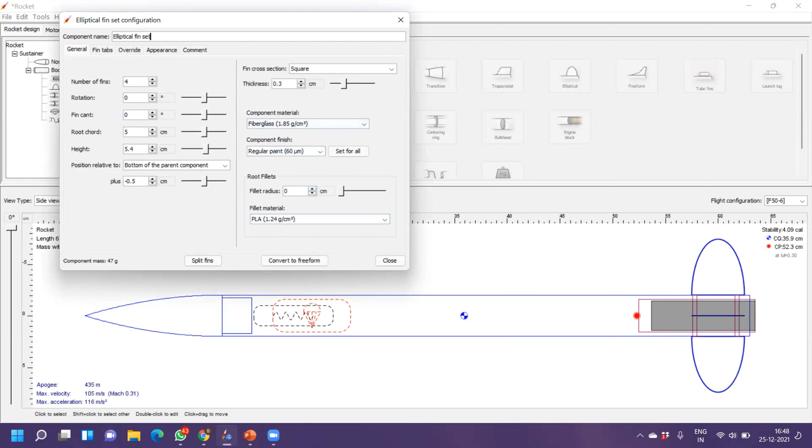So this elliptical fin, as we discussed earlier, for subsonic and generally also, is the aerodynamically best fin. I worked on this and also read about materials we can use. G10 fiberglass is the material widely used these days for manufacturing these kinds of rockets. I put G10 fiberglass as the component material while selecting other criteria like length and other things. If manufacturing is easier for us, I'll go ahead with that, or else I'll change it to PLA or something else. I also read about testing, because once we have the model we have to test it.

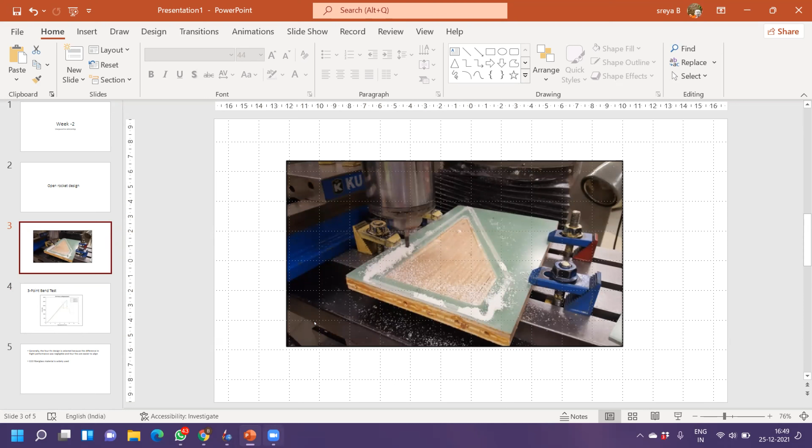I think we are only manufacturing it ourselves, that's why I didn't study much about the manufacturers. Or else, even if we are not manufacturing it from campus, we can order it from IndiaMART, I saw the availability there also. So I worked on these. Selecting the diameter and working on the actual values took a lot of time. To get the desired stability, if you see, the stability is also a good value here.

And now I'll be making the CAD design in this way. It's given in this research paper, how to design, what criteria we need to select while modeling the rocket in OpenRocket, and other CAD information related to the CAD software. So in this way, I'll also make the CAD design for my fins and come up with that by next week. I'll also take suggestions from the mentors as to how to proceed with that.

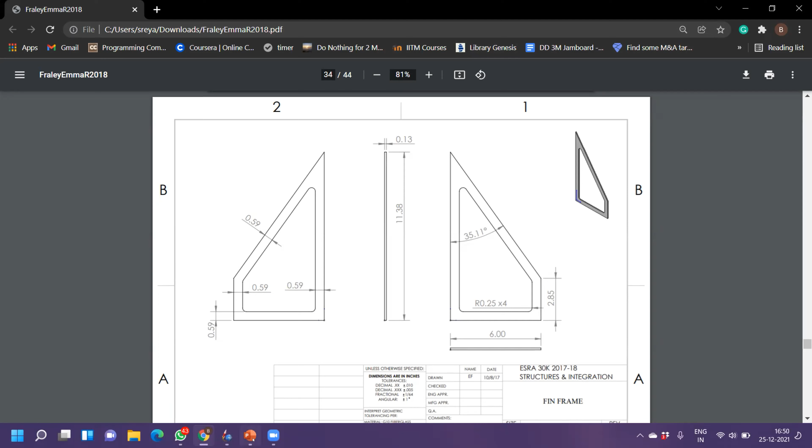Fine, Shreya. So then what is the temperature it can withstand? Do you know what is the flow temperature over the fins, from an aerodynamic point of view? Do you have any idea about that? Specifically, I haven't studied about the temperature at which it can withstand. I'll just check it out now, what is the operating temperature of this kind of material.

It should be compatible with the actual flow conditions. Generally, G10 fiberglass is widely used, so I think it is okay to choose this material. I'll also confirm it and mention that in the next meeting.

I've noted that. So then you do some groundwork on that. What is the temperature and flow over the fins? What is the Mach number over that, and based on that you can find out the temperature of the flow, so that the fins can withstand that much temperature. You can use other materials or optimize the material configuration for the shape.

So whatever you are doing is good actually, but we need, if you are producing something, like a car or whatever it may be, to first see the ground reality. So then what is the speed, mileage, all these things. Like that, here also you should target the actual flow conditions, the temperature and the velocity, all these things.

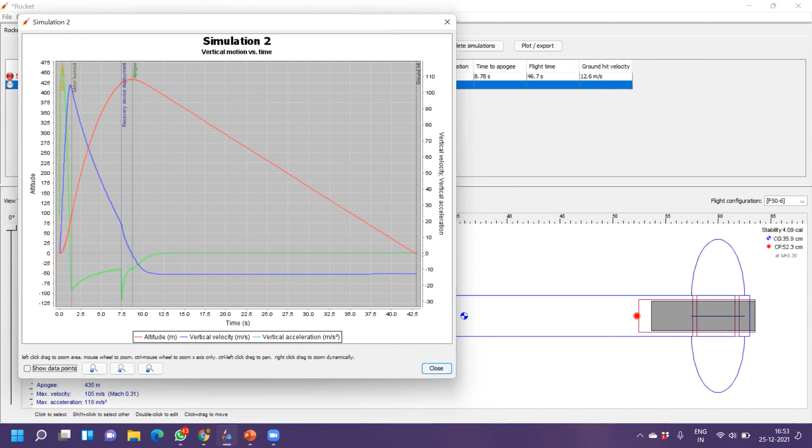Last week I presented a few ideas, of which the aerospike nozzle was the one I went through. I'll introduce designing the aerospike nozzle in the next slides. The advantages are altitude compensation and fuel savings, and the expansion ratios are also quite high, like 200:1 and 300:1, which increases the thrust and specific impulse, and it's better suited for SSTO flights, single stage to orbit.

There are few disadvantages of the aerospike, like a slip stream effect which reduces nozzle performance, as when the air outside the rocket gets disturbed, since the outer boundary of the nozzle is basically the atmosphere, it might decrease the performance. At higher altitudes the bell nozzle performs a little better than the aerospike nozzle. But if we use a truncated aerospike nozzle, it will reduce the mass and might increase performance a little bit. The main big disadvantage is that we can't find an aerospike nozzle currently in use.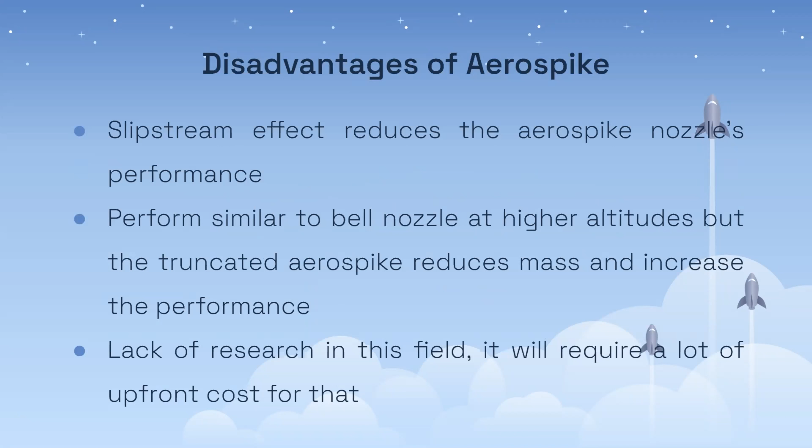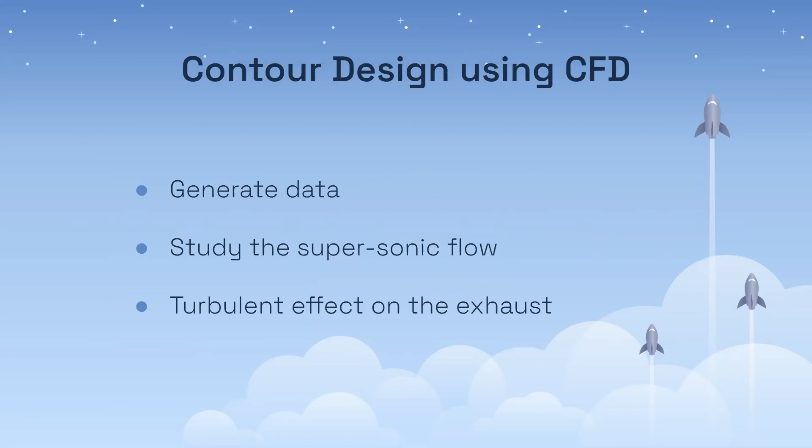So what I will be doing this week and next week, and what I was trying to do this week, is contour design based on CFD, to generate data and understand the effect of flow, and study the supersonic flows, as it introduces turbulent effects on the exhaust gases which are quite complicated to study.

I've been reading this paper for a short period, 'Design and Optimization of Aerospike Nozzle' by Naveen Kumar. He presented this paper in 2017, so it's relatively new. In it he mainly discusses different types of nozzles, and also the design altitude and the effect of the stream at higher and lower altitudes than the design altitude.

So basically, after the design altitude, meaning at higher altitudes than the design one, the pressure on the spike is constant, so we don't see any increase in performance. But at lower altitudes, the wall and the expansion ratio change according to the atmospheric pressure.

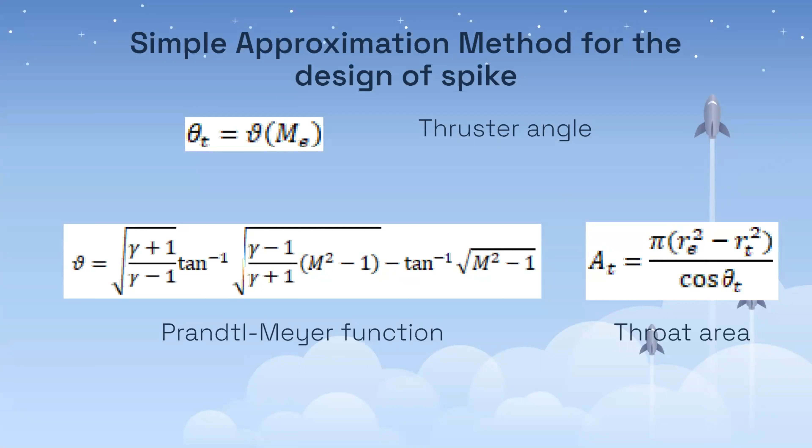So after that, he uses these functions to calculate the contour of the spike, the thrust angle, the Prandtl-Meyer function, and throat area. The Prandtl-Meyer function takes the exit Mach number as input, which is used to calculate the thrust angle and the throat area.

In the paper, he mainly discusses three different versions of the aerospike nozzle: one is the full length nozzle, another is the 40% truncated nozzle, and another is the base bleed nozzle, which is truncated.

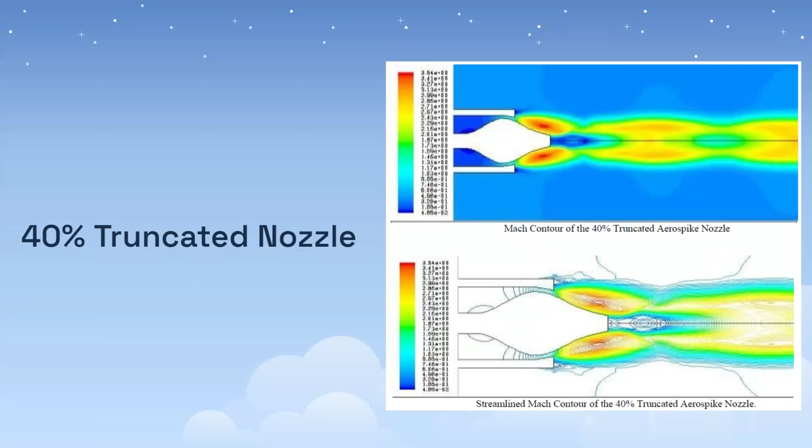In the full length nozzle, the mass is quite high, but it also produces more thrust, as the exhaust gets more area to push against the rocket. In the truncated version, the mass decreases, but at the same time the thrust also decreases. In the truncated base bleed model, we get a lot more thrust and the mass is also decreased, but at the same time the mass flow rate increases. These are the few conclusions he presented in the paper.

What I am planning to do next week is to reproduce these results on my own, as the paper only used these three versions, which might not be sufficient to understand the effect of nozzles at different altitudes, since all the results are produced at the design altitude. I will also try to understand the effect of temperature, as throughout the paper he used only a constant temperature fluid, at 300 Kelvin. So that's my update for this week.

Next week I'll be using some CFD software like Ansys Fluent to reproduce these results and improve on them.

Aditya, on what basis did they mention that the 40% truncated bleed configuration could improve thrust by 14%? Based on the CFD results they presented, the thrust coefficient, or how are they measuring it? The thrust decreases and increases based on the truncation, and its total weight also reduces — based on the length, it's around 29% reduction.

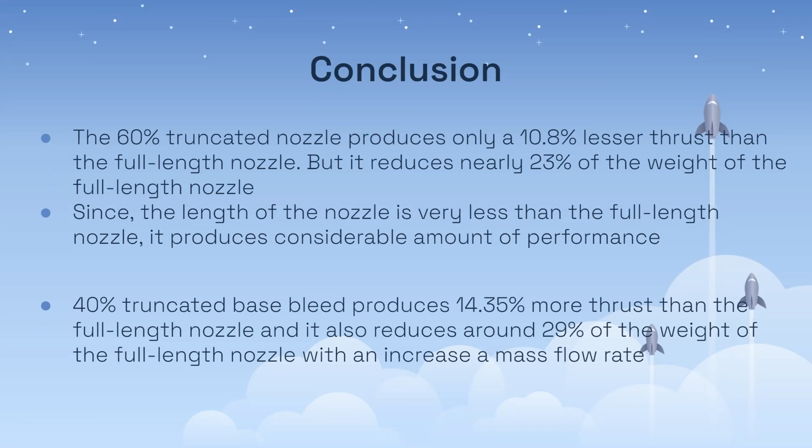I'll stop sharing. Yeah, that's fine. Last presentation, Manashweta.

Yes sir, I will go ahead. Actually, I selected multiple topics and discarded them and selected again. The voice is broken — the internet isn't working, sir. Okay, one minute.

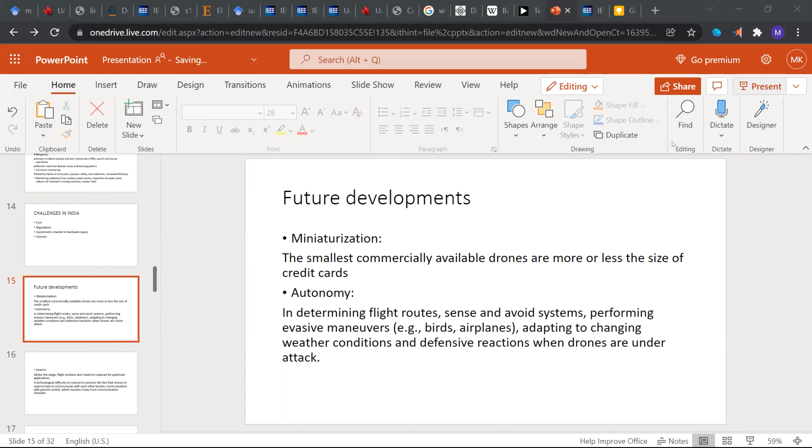Can you see my screen, sir? Yes, we are seeing it, and skipping also. So then, okay, what is your plan? What are you going to do with the drones?

Sir, finally I decided to research more on UAV to UAV communication, but actually in the middle I also researched other stuff. Last time I didn't do anything specific — I listed applications of drones and future developments. So what are you planning to do now, in terms of writing algorithms or improving communication systems? I think communication, sir — UAV to UAV communication is less focused on.

What frequency range are you planning to use, so that it doesn't interfere with government agencies' frequencies? You should know that. What is it actually, what range are you planning to use for the communication data, what frequency range? Actually, drones don't have a specific frequency range, right sir? It's unlicensed, right?

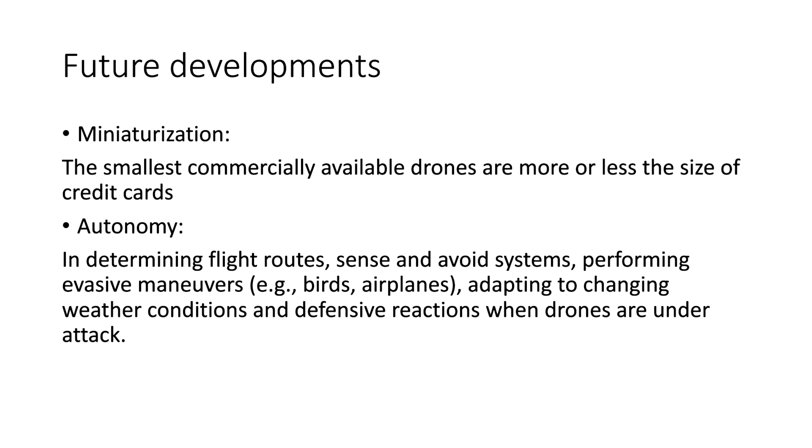Like there is no spectrum available only for drones. No, that is also specific. No, so sometimes if you are using, like, government agencies, they are using some sort of frequency ranges. So if you are using, I'll search for that. Sir. Yeah, it is not. They will not allow you to use that. Anyway, that is fine. So then, what are you planning to?

So the communication between the user and the drone is okay. So how do you make the communication between two drones? Okay, sir. I'll move to that slide. Actually, I researched radar modes also, and then I stopped and decided to do that, sir. And then I did micro UAVs and then micro UAV swarms, and finally communication between drones in swarms, sir. Okay, so you come up with some idea.

I just wanted to focus more on this, sir. I actually wrote some ideas, but people already have them, sir. Already, okay. Yes, sir. That's why. Like this one drone can be used to monitor another drone. Micro UAVs can't carry many sensors, and weight restrictions will be there.

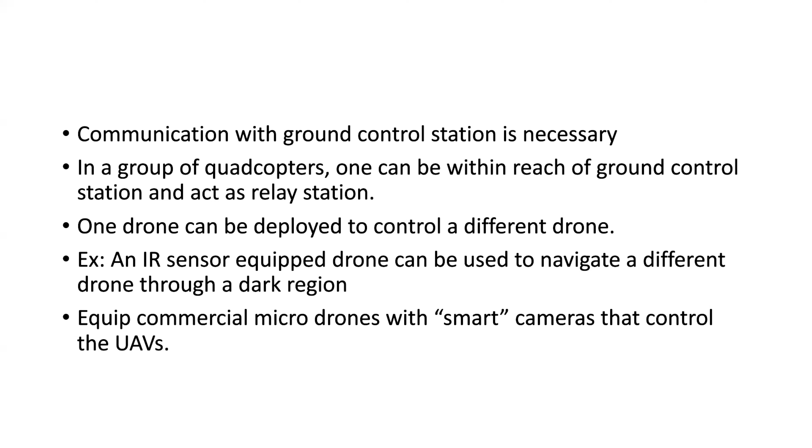And what is your plan? So you are just deploying one drone. Already some drones are there in that area. Or what is it actually? For communication, sir. Yeah. I think they use ground station only, sir. They definitely use ground. They're researching on this, I think, sir. Okay, so Manushita. Broadcast channels do exist. Sir, okay, yes, sir. Have you done any?

Okay, sir. I have an advantages list also, sir. Okay. It improves the autonomy of swarms, sir, UAV swarms. Avoidance and data transfer and gathering, and the benefits in terms of spectral and energy efficiencies. Autonomous flight of UAV swarms. Actually, already two drones are there. You are making communication between them. Yes, sir. How do you do it?

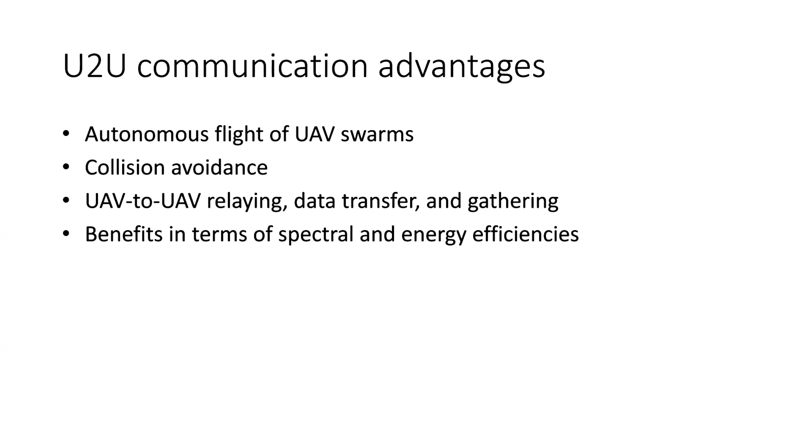So, like, we are not from an electronics background, but still we are always looking for it. Yeah. Actually, I selected communication because I'm from EE, sir, so it's more suited to me. I thought so. Like, I don't have any experience though, sir. Nothing. It is fine, no problem. You have to use your ideas so that you can improve it.

The operating range is allowing BLOS control and external cellular coverage and reduced backhaul demands. What is it actually, that point? Backhaul, sir. I think it's related to the ground station, sir. I do not know the exact definition. I researched it a while back. It is like feedback signals data. Yes, sir.

Manushrita, you are on campus now? Yes, sir. Oh, super. Okay, so there is one technique I was reading about that the US Air Force is using. When they fly an Air Force airplane, there's one more UAV, an unmanned airplane, flying alongside the actual aircraft which is flown by a pilot. He is also able to control the one flying side by side, which is unmanned. This is one of the technologies I read about recently, and to use that, first we should do some basic hands-on work.

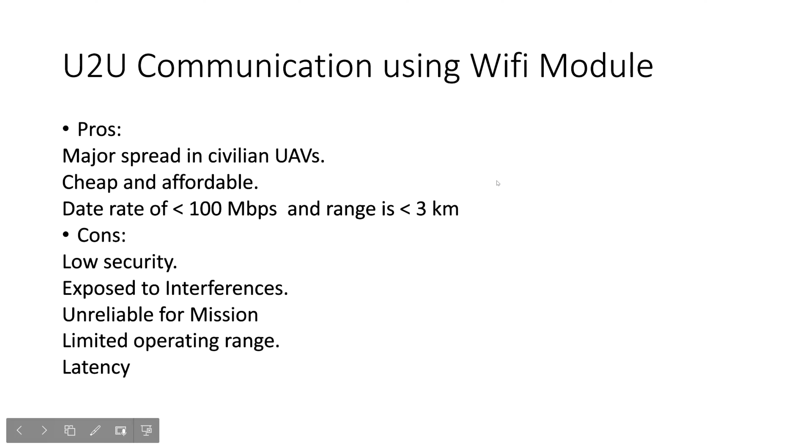So last week they presented more than 12 or something like that, no? This week only some 6 or 7.